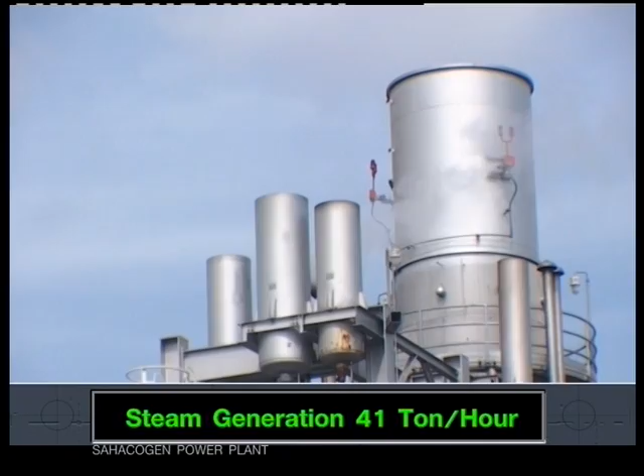Our cogeneration combined cycle power plant originally was designed to produce 122 megawatts of electricity and 41 tons of steam per hour. 90 megawatts of this output is sold to EGAT, and the remaining electricity plus steam is supplied to industrial users at the Sriracha Saha Group Industrial Park in Sriracha of Chonburi Province.

We of Sahacogen Company attained firm confirmation from EGAT to purchase 90 megawatts of electricity under the Small Power Producer Program in March of 1996.

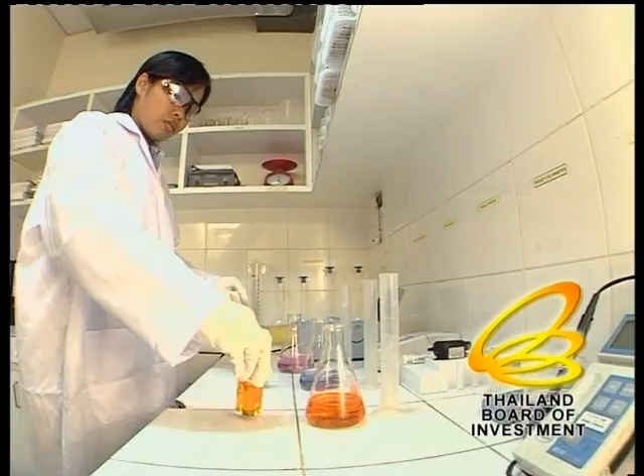In the following year, 1997, support for this project was acquired from the government's Environmental Office and the Board of Investment. Sahacogen Company also was able to conclude contracts for selling power to EGAT, purchasing natural gas from the PTT Public Company Limited, and having a power plant operated and maintained by Operational Energy Group Limited.

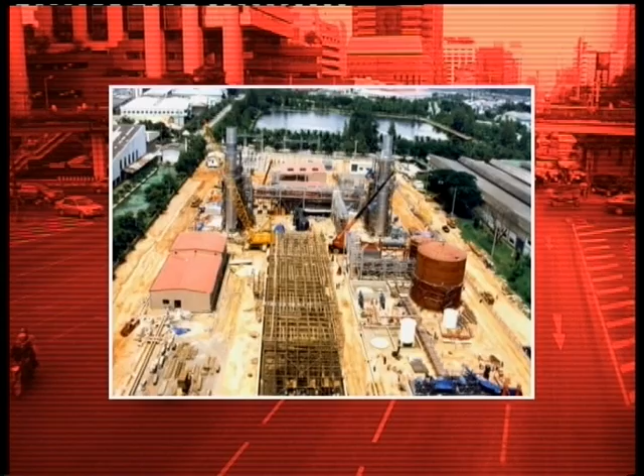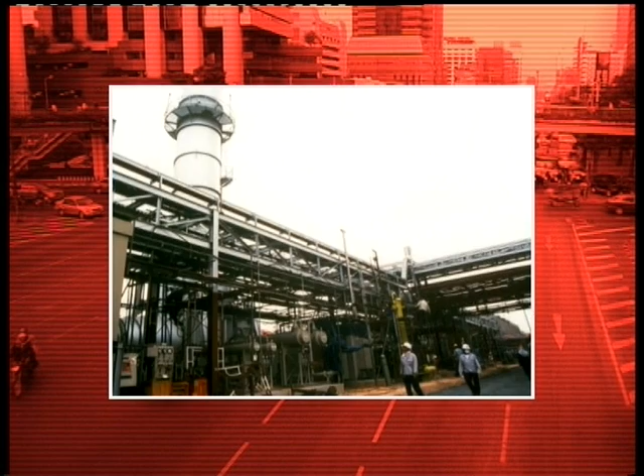In spite of the economic crisis which engulfed Thailand and Asia during that period, Sahacogen was able to obtain financing for the entire cost of the project in June of 1997. This totaled $53 million plus 520 million baht from a consortium of domestic financial institutions.

Construction of the plant, a natural gas pipeline, and a power distribution system were completed, and the commencement of commercial operations was achieved in April of 1999.

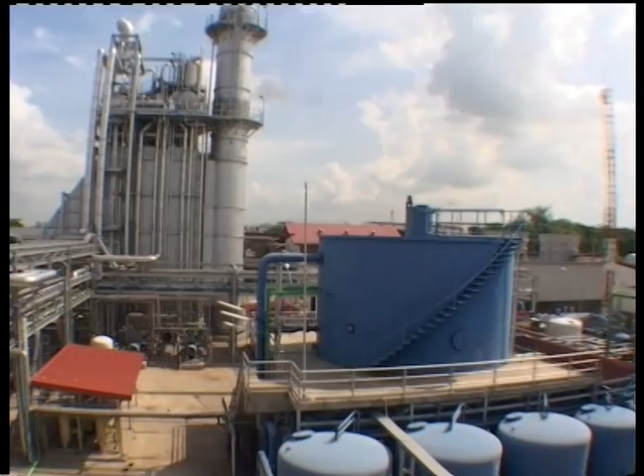Sahacogen has chosen cogeneration combined cycle technology, which is the most efficient method for generating electricity and thermal energy in the form of steam.

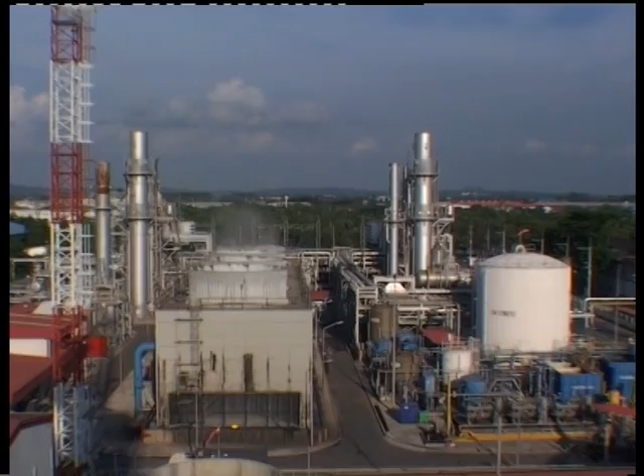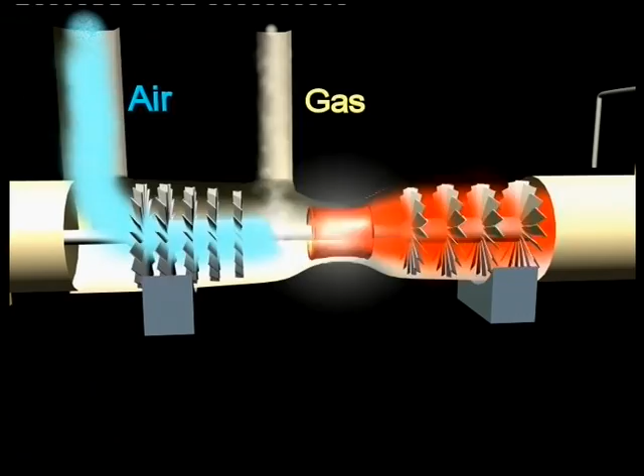The cycle starts with the ignition of a mixture of fuel gas and compressed air in the combustion chamber of the gas turbine. The sudden expansion of this heated gas at the moment of combustion drives the turbine rotor and its coupled electric generator, thus producing electricity.

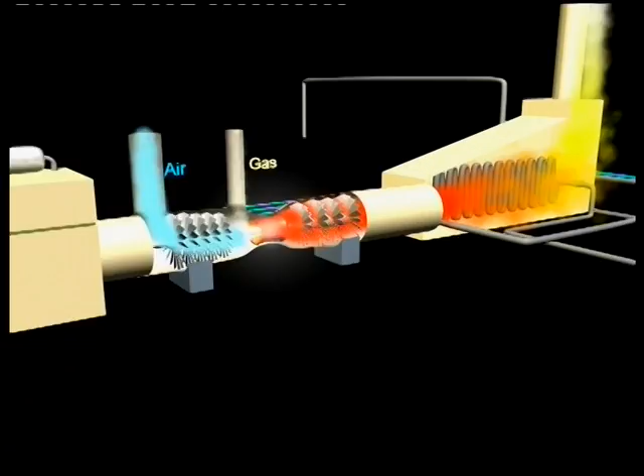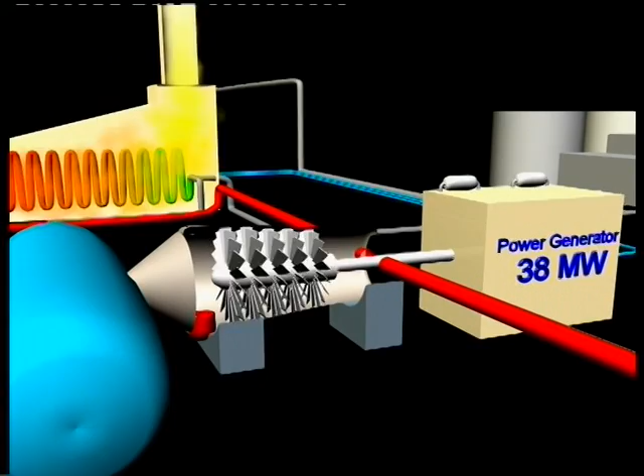After driving the gas turbine generator, the exhaust gas is introduced into the heat recovery steam generator unit in order to produce high-pressure steam for driving the downstream steam turbine generator and for serving industrial requirements.

The steam supply to industrial users normally is extracted from the intermediate steam turbine cycle rather than from the high-pressure steam header.

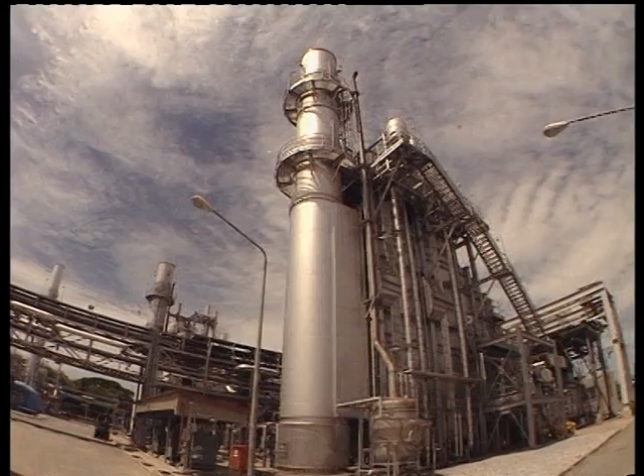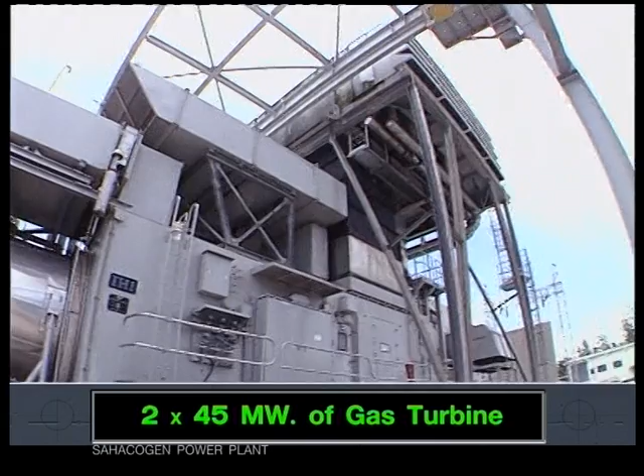In its initial stages, the Sahacogen power plant had 2 gas turbine generators, each with an output of 45 megawatts, and one 38-megawatt steam turbine generator.

Due to the high variations in demand from EGAT and the industrial park, the company has chosen the aeroderivative type gas turbines, which are capable of operating at partial load with minimum loss of efficiency.

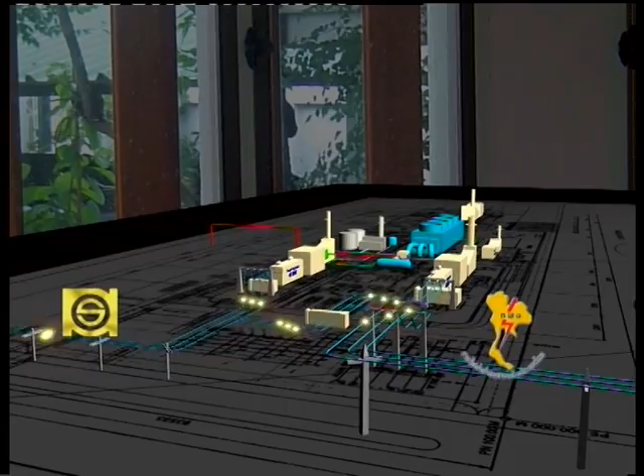To ensure consistent delivery of electric power and steam to the industrial park, the company has designed a delivery control system to isolate the power plant automatically from the national grid when any external disruptions occur.

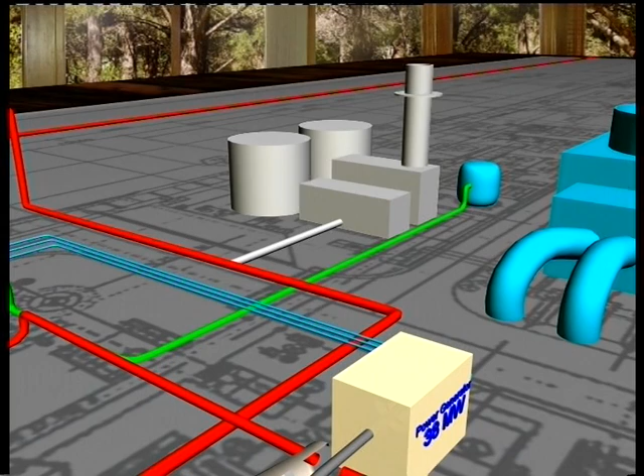If the plant's operation is interrupted entirely, backup power from the PEA will be imported automatically and supplied simultaneously to industrial users. Steam will be supplied from a backup boiler with a capacity of 41 tons per hour.

Later, in November of 2002, the company successfully integrated a 45 megawatt and 20 tons per hour steam cogeneration unit into the original plant. The expanded facility has enhanced the company's production, vastly improving stability, reliability, and operational efficiency.

In that same year, the company changed its shareholding structure and became a public company, with the trading of shares in the stock market commencing in January of 2004.

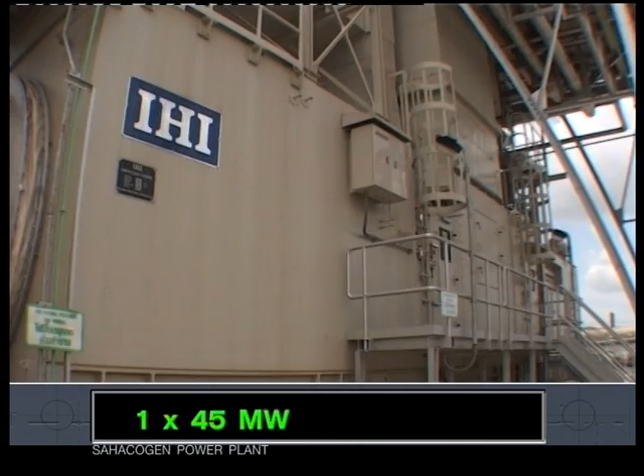Money was invested as equity funding for the installation of another gas turbine. This provided an additional output of 45 megawatts. Also added was one heat recovery steam generator with a capacity of 20 tons of steam per hour.

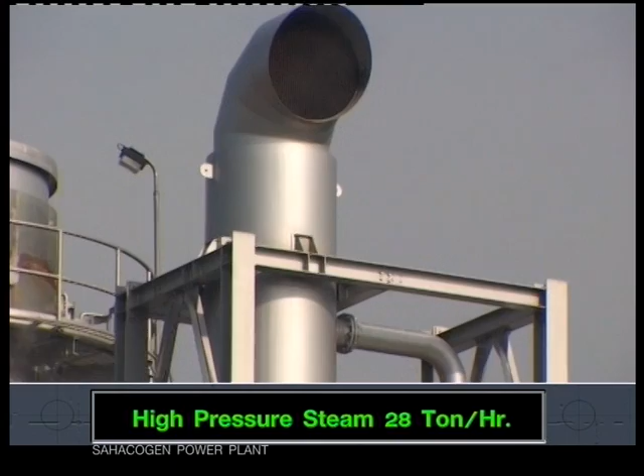This was used to increase supplies to industrial users. 28 tons per hour of high-pressure steam displaced the existing production process at the time, which had low efficiency caused by the heated gas from the direct ignition of the fuel gas.

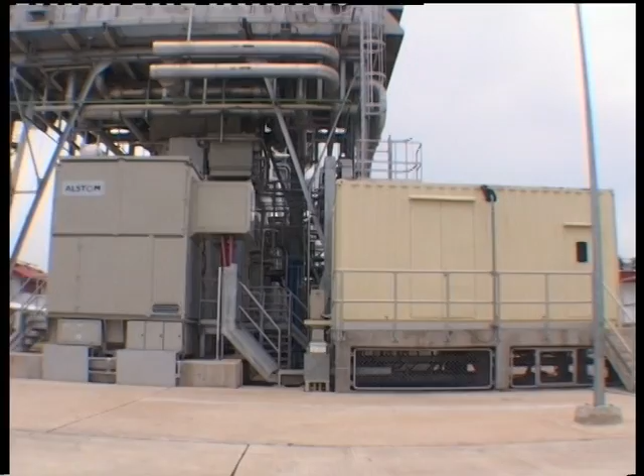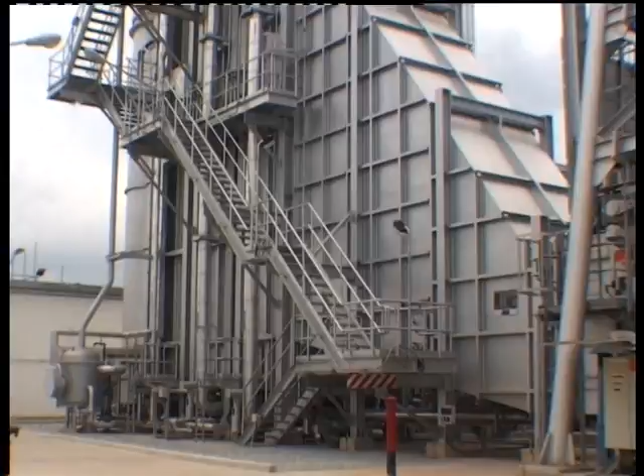This expansion resulted in the company's ability to produce electricity in case the heat recovery steam generator required maintenance. This expanded project further allowed us to distribute electricity to industrial users starting in March of 2005. We completed the generated cogeneration combined cycle in October of 2005.

At present, Sahacogen power plant has the production capacity of 174 megawatts of electricity and 81 tons of steam per hour to support a rapidly increasing demand for electricity and steam in the industrial park.

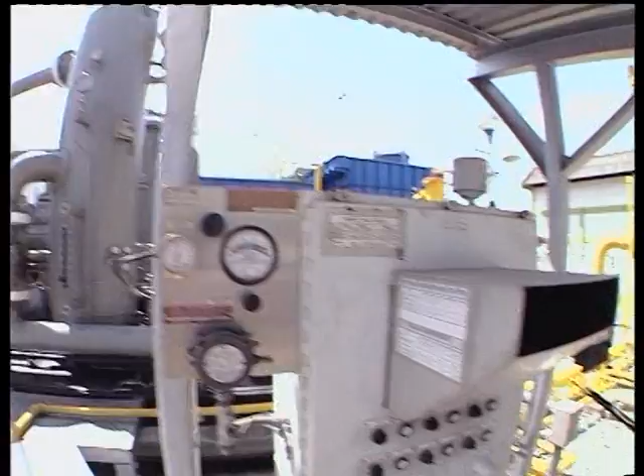As international certification for our efficient energy generation and reliable energy distribution, the company has received ISO 9001 version 2000 from the Management System Certification Institution, Thailand.

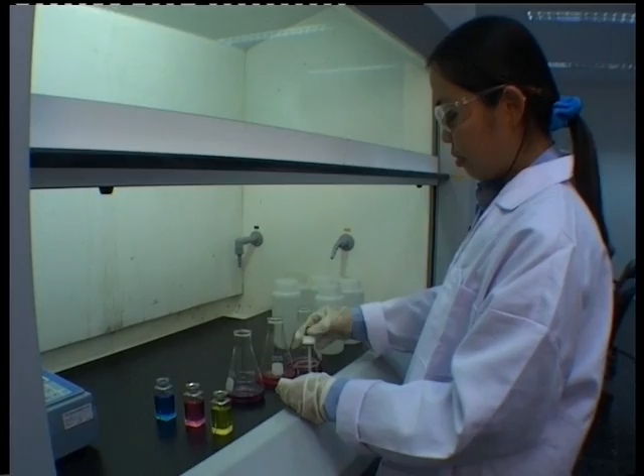The company regularly and continually examines and controls any impacts affecting the environment. As a result, Sahacogen has received full certification from the Office of Environmental Policy and Planning of Thailand's Ministry of Science, Technology and Environment. The certificate states that Sahacogen is a company that implements the appropriate prevention and mitigative measures in accordance with Environment Impact Assessment Category A power plant in the year 2000.

In 2002, Sahacogen Company was certified as compliant with ISO 14001 version 1996, the environmental standard set by the Thai Environment Institute. As a result of consistently monitoring and effectively controlling the maintenance of its environmental standard, the company has been recertified with the latest standard, ISO 14001 version 2004, by the Management System Certification Institution, Thailand, in the year 2005.

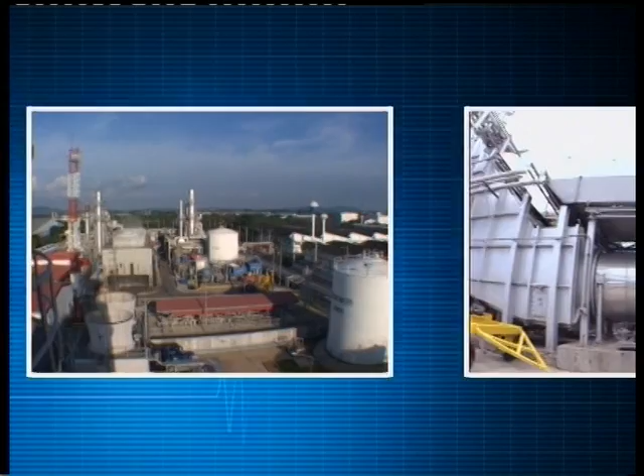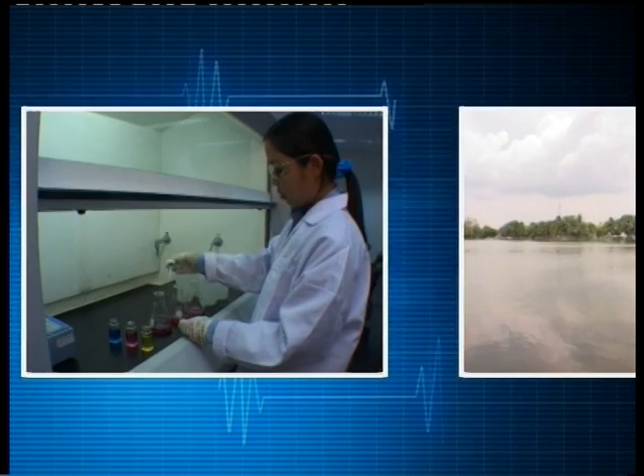With this positive approach to power production, we at Sahacogen Chonburi Public Company Limited are determined to continually improve the efficiency and quality of our power production and service operations. We shall continue to safeguard our environment as we work for the total development of Thai industry, now and far into the future.